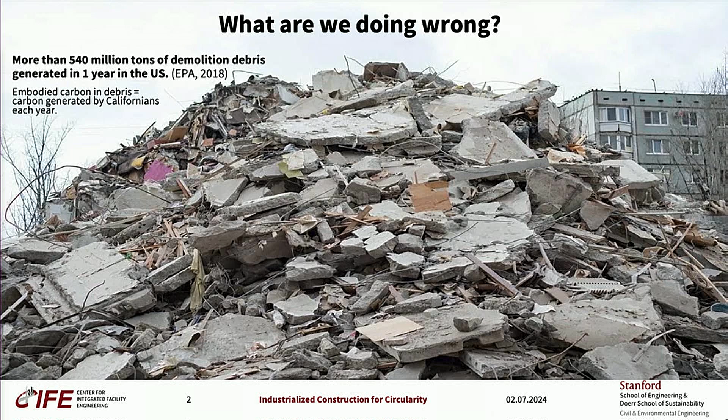If we think about design, we expect our buildings to live about 50 years or more. This is the typical design life. But we discover that, especially in some countries, the effective life of the buildings is much shorter. Buildings are demolished after 20 years or 30 years.

And if we look at reasons behind demolition, the buildings demolished are typically still structurally sound. Only out of many buildings demolished, only 3% of them show some structural problems. Many times we demolish buildings because we would like to do some redevelopment in the area they are located in, or because they are no longer suitable for our needs.

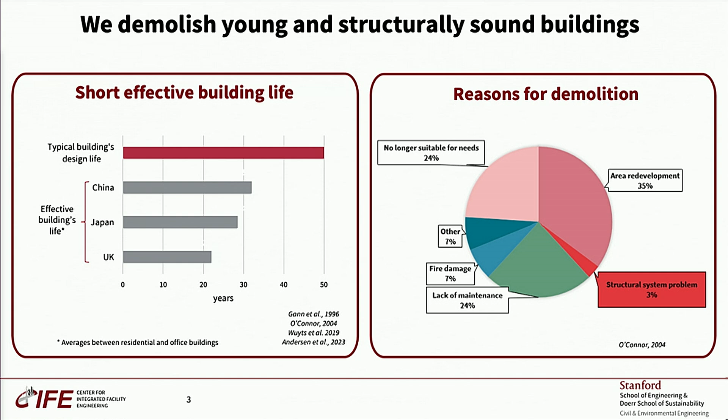So in summary, we demolish buildings that are still relatively young and structurally sound. And unfortunately, materials and components from these demolished buildings go to the landfill, where we would like to avoid placing them, and possibly recycle materials, reuse materials and components to make new buildings, and ideally reduce the amount of new buildings and extraction of raw materials.

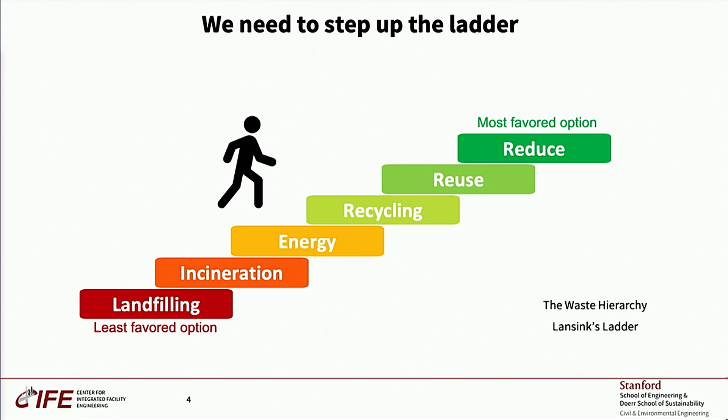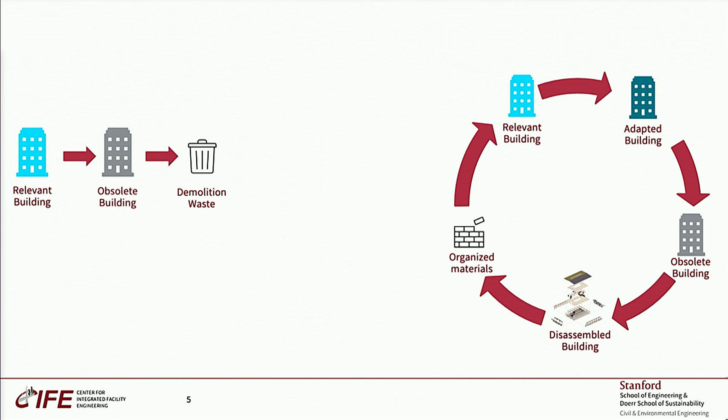So what we need to do is make a shift from a linear process in which we extract material, construct buildings, use it, demolish it, towards a more circular process in which we adapt possibly many times the building. And in case we don't need them anymore, it would be possible to disassemble them, deconstruct, and then in a very organized way, reorganize and reuse those materials.

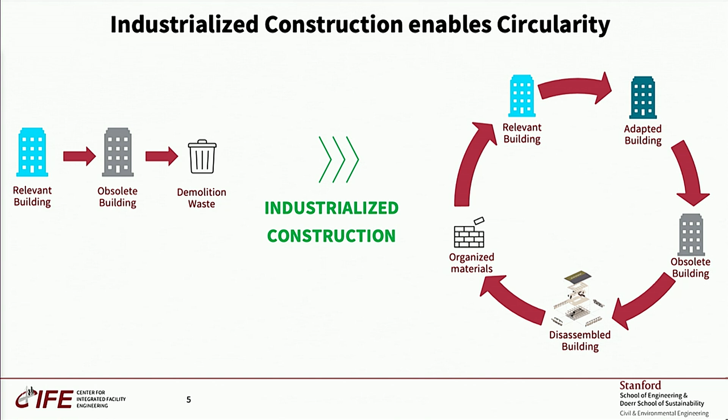And industrialized construction, I think, is the best strategy available nowadays that can bring circularity to our industry. And in this talk, I will talk about why and how we can do that.

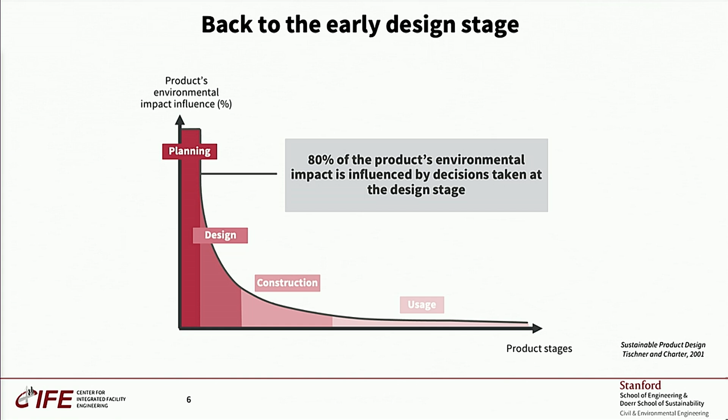So first of all, we need to go back to the early design stage. Because 80% of the environmental impact of a product is influenced by decisions that we are making at the early stage of design. The early stage is very critical, and we would like to put our project on a good track.

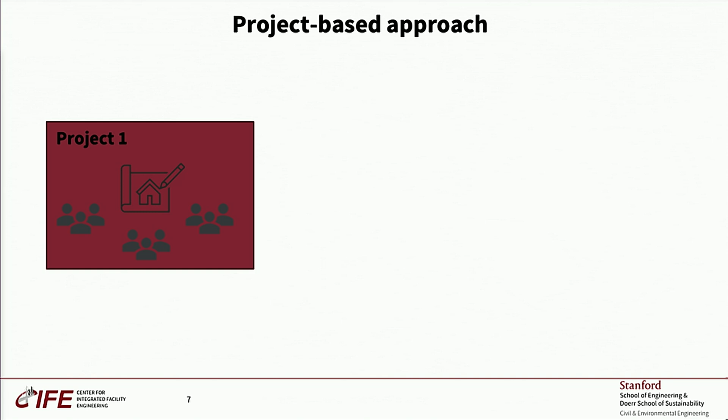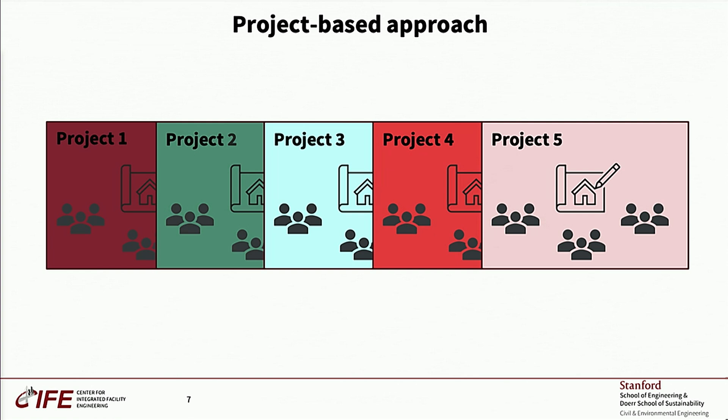So in a project-based approach, a traditional approach, we start with project 1, and we try to design a more adaptable building, more disassembled. We think about materials and technical systems to use. We complete the project, and then we move to project 2, and we need to do it again. And this is happening again for project 3, 4, and 5. And it's very difficult to achieve any consistency in improving sustainability and circularity of our buildings.

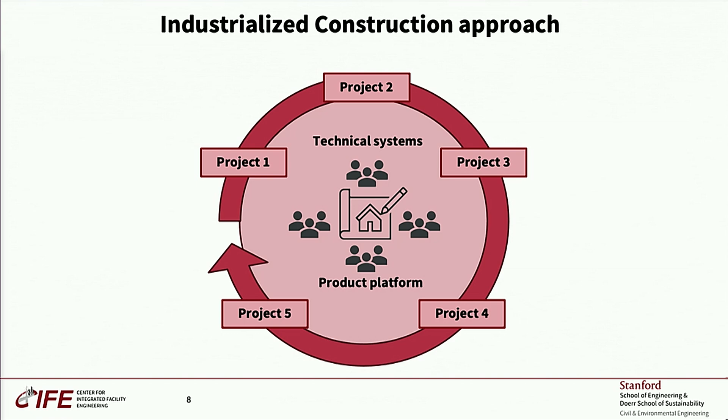So industrialized construction has advantages. Yes, the projects will slightly differ. They have variations, but overall, we can work with technical systems. We can possibly repeat the same technical systems over and over. And then we also work with product platforms that help us configure a building and pick different options, but a limited number of options still.

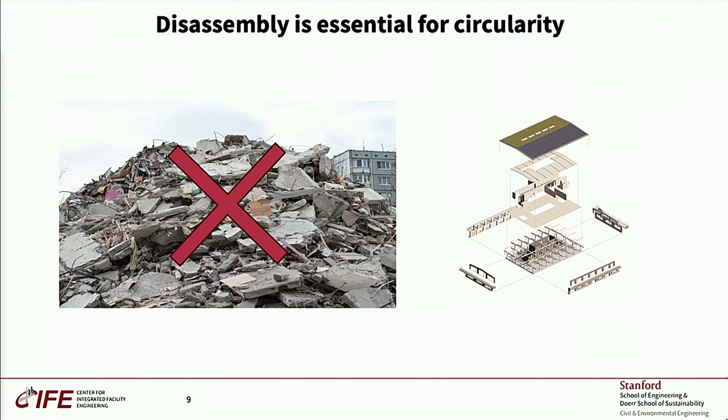So to avoid this huge amount of waste that we generate, disassembly is essential. And without disassembly, we wouldn't have circularity. So let's dive in. To ease disassembly, we can divide our product into different technical systems.

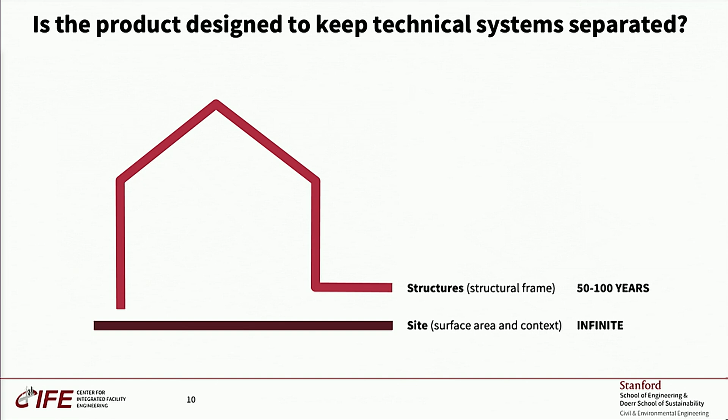So we have the site in which the building is located, but then we have the structure that hopefully lasts more than 50 years, and then other technical systems that have a shorter lifespan. We would need to divide technical systems with different lifespans. We have skin, so facade, envelope, and roof, and also services, which include MEP.

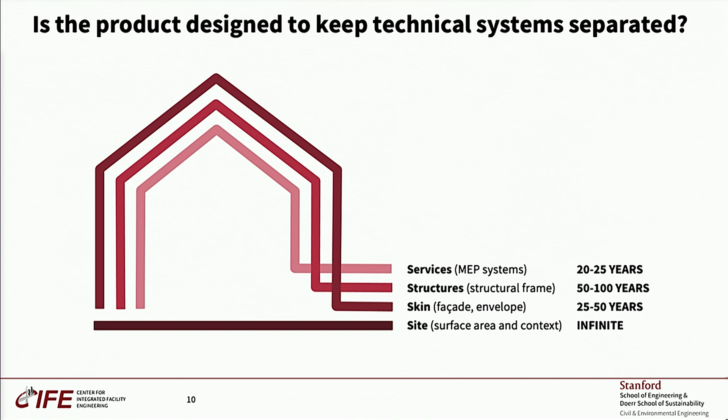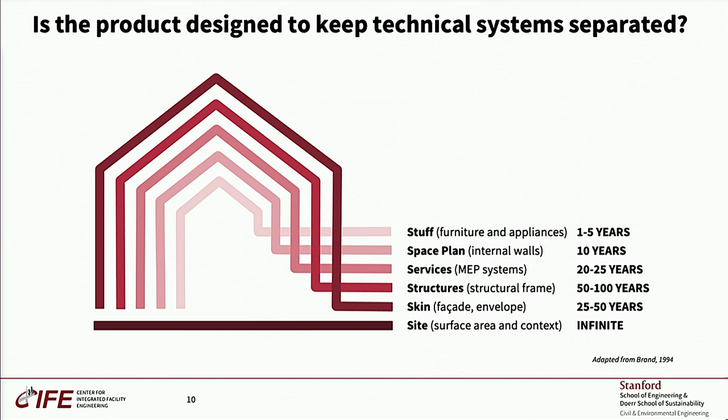Those technical systems, likely we would need to repair them, to access them, to maintain them, and also substitute them over the life of the building. So that's very important, that their life is shorter than the structure. And then also space plan, internal walls, and furniture and appliances with even shorter life. So these are the technical systems I'm referring to.

And when I looked at case studies, I realized we are not always keeping the technical systems separated. In particular, the way MEP systems are designed does not favor easy disassembly. As you can see, this pipe is embedded in the structural system. If I need to repair, substitute, or move it, it's really challenging.

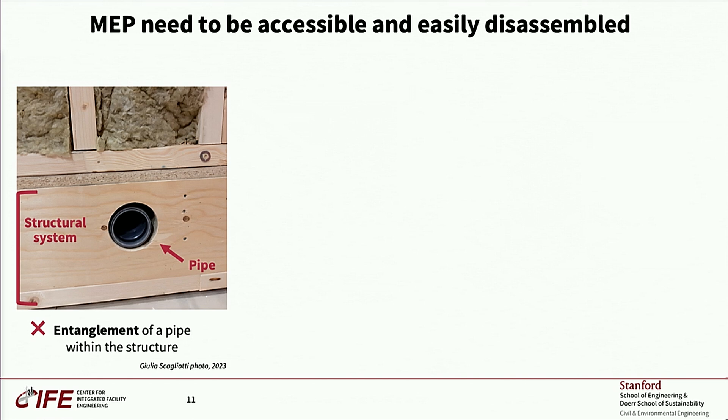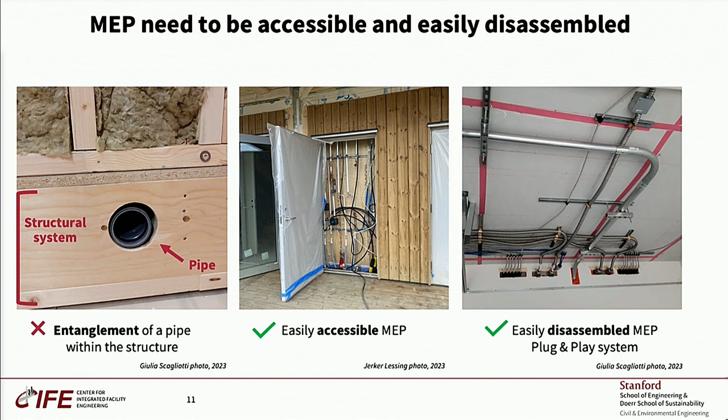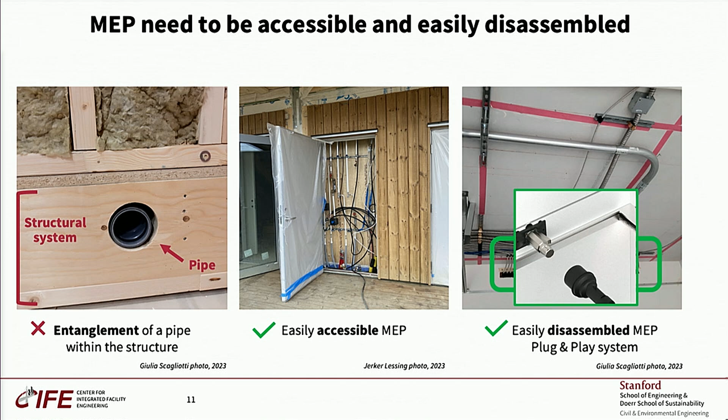But we also have good examples from practice. This is a good part of an MEP system that is easily accessible from a terrace. And this is a great example of a very easily assembled and disassembled MEP system. If we zoom in, we see that the connection is based on a plug-and-play system, really easy to assemble and disassemble.

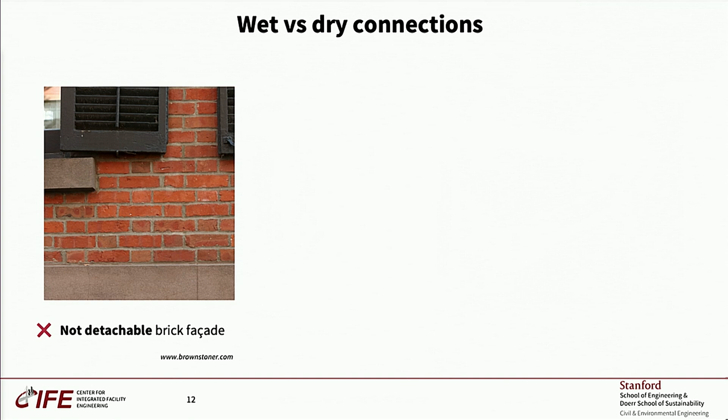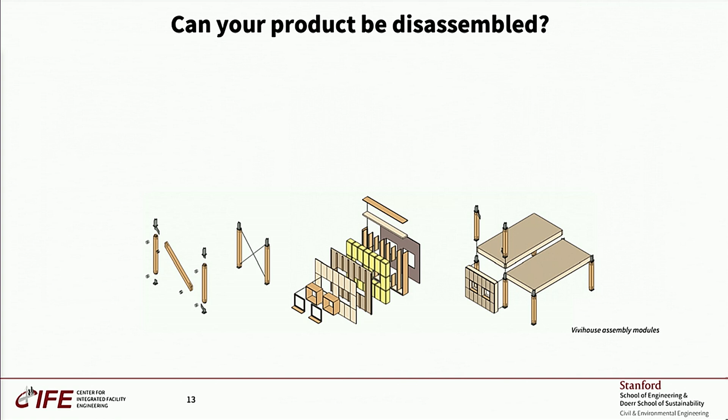And it seems we identified some technical systems that may work, but however, from interviews, I found that IC companies are aware about this, design for disassembly, but are not always interested in it.

Company one shared with me that they are making long-lasting buildings, and they are not dealing with disassembly. Second company didn't have disassembly among their priorities. Third company was very convinced to have a product that can be disassembled, but they never tried to disassemble one. And another company needed to disassemble their buildings because they made some mistake during construction.

And they shared with me that it was very, very challenging to disassemble their product.

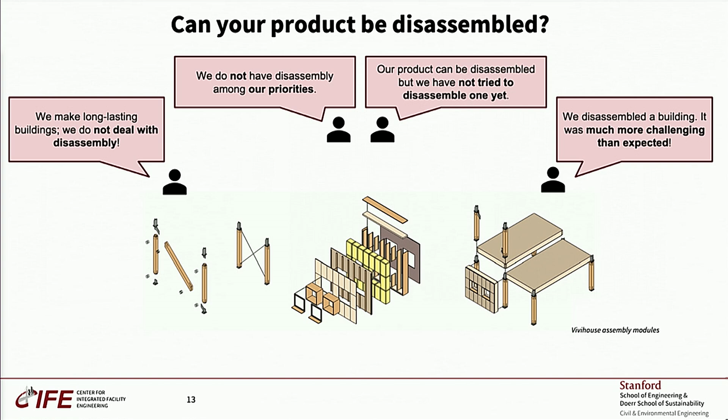And that's because it wasn't designed for disassembly. So disassembly should really need to be considered from the early stage, even if it will occur far in the future.

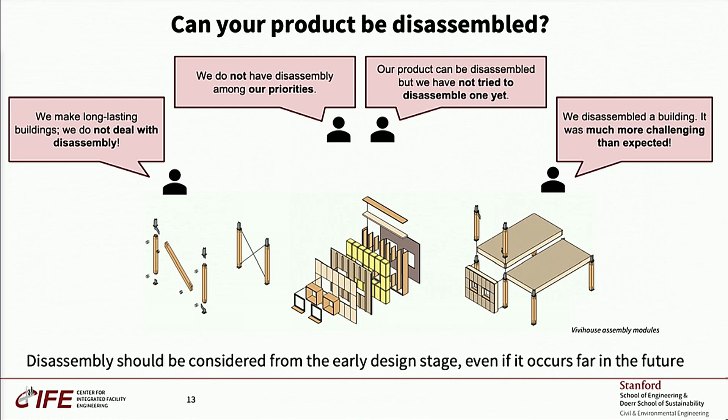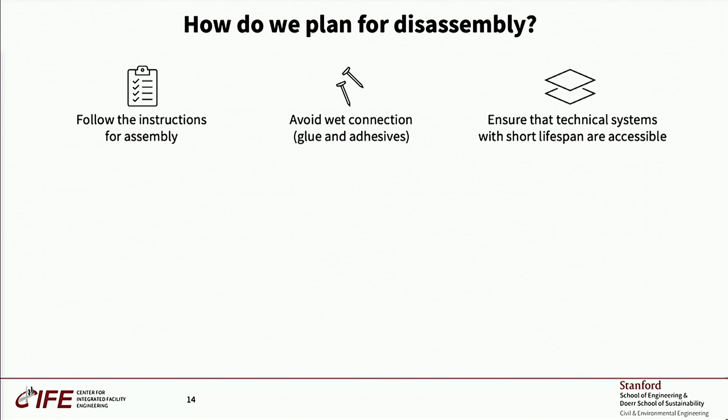So how can we plan disassembly? First, workers need to carefully follow some instruction without adding extra nails or extra elements during construction. We should avoid wet connection where possible and

favor dry connection, and also placing those technical systems with a shorter life in a way they are accessible. A solution that some Swedish companies found are developing guidelines for disassembly, in which they list all the steps they need to do to complete a disassembly project. They elaborate instructions, put images, and also the equipment needed to complete their disassembly.

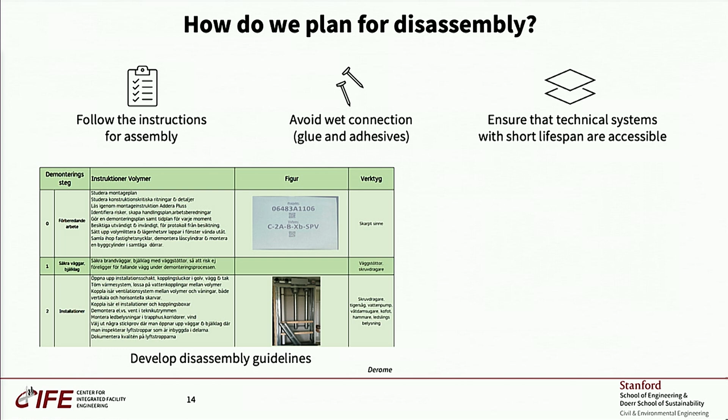And if during disassembly they encounter some problems, it would be very helpful to keep track of those problems and fix the product, and a continuous effort to improve their product and increase the disassembly potential.

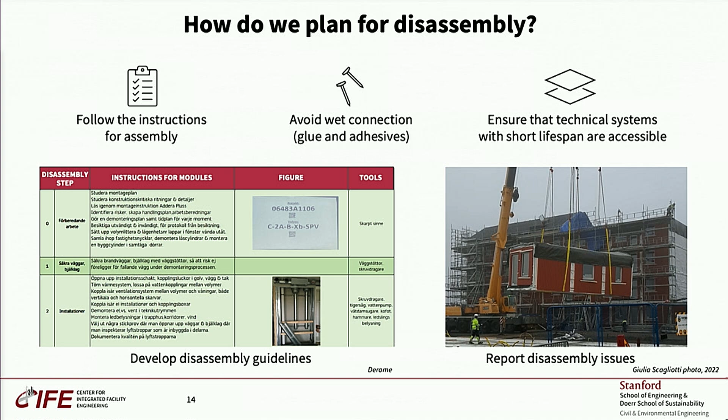So we know that we don't have only technical system, we also have product platform. They collect already the technical system and the elements within the technical system, but it would be very helpful to also model the interfaces, the connection, the type of connection, the material the connection are made of, the relationship between technical systems and elements, so we would know how a facade is connected to walls and so on.

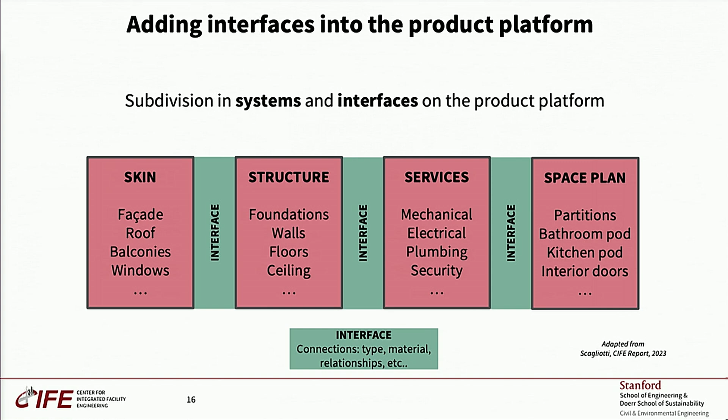And this is how a product platform that model also interface would look like. And we have product platform in which we have distinct technical systems.

We could add also a lot of information: the lifespan of each system, the materials they are made of, the quantity of material, the expected end-of-life treatment, if they are going to be reused, recycled, or downcycled, and the expected value those materials or systems can have. And compared to material, system can have a higher expected value.

So we basically are building a material and system passport in which we see the building as a temporary depository of material.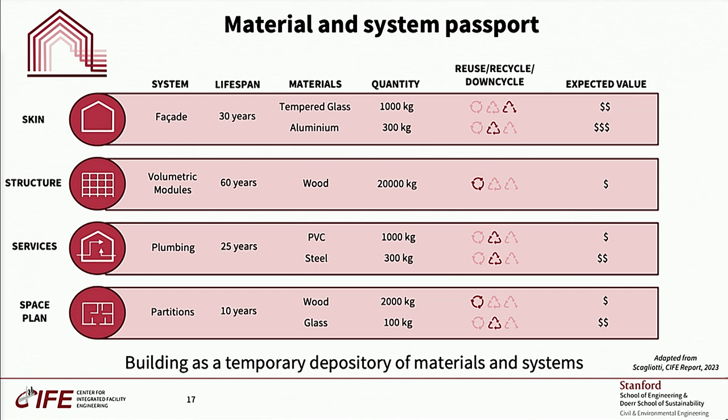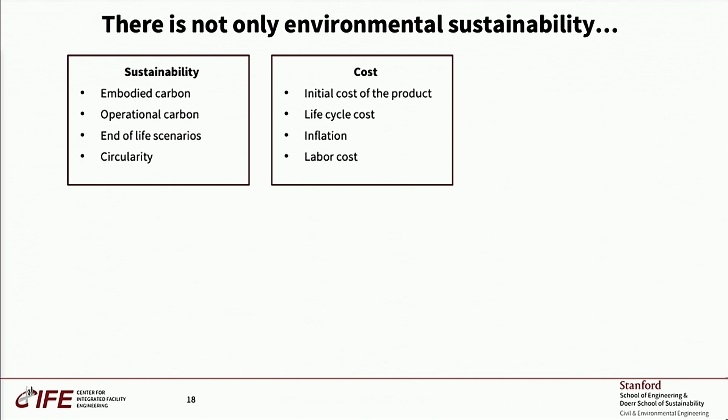But we know that there is not only sustainability. There are so many other needs and interests. So obviously also the cost. We are interested in the initial cost of our product, the time in which we complete a project, eventually if

we care about circularity, also the disassembly time, the quality of the product in terms of durability of their material and the systems, the suppliers, our relationship with them and the reliability of suppliers, and also some project specifics, and many other more variables. And obviously we need to comply. We must comply with certain regulation.

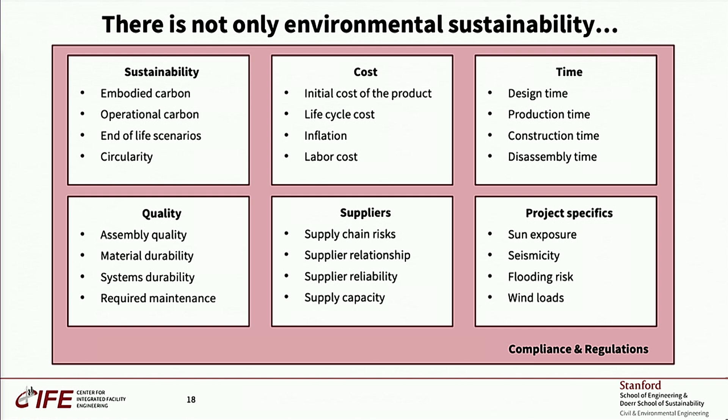These are all important, and we can look at other industries, how they look at the problem. Some of them adopt design for excellence, which is a concurrent engineering philosophy, in which X can be a variable that can have many values.

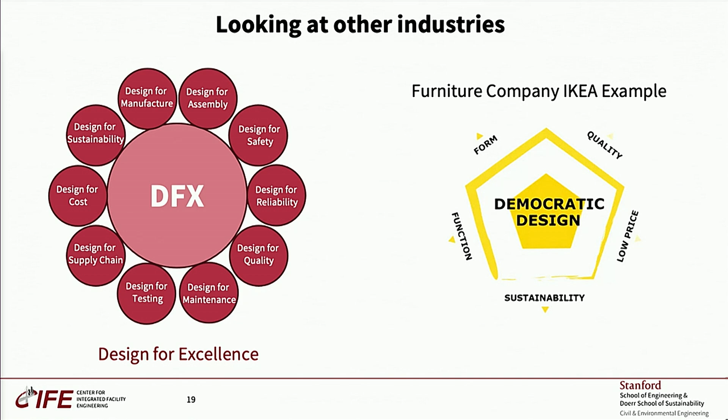And the furniture company IKEA is adopting this strategy and is selecting 5 core values, which are sustainability, form, function, quality, and low cost, low price. And they try to make those 5 core values work together.

And actually, industrialized construction, compared to a traditional project-based approach, has better opportunities to select the core values they are interested in and make them work together.

So we are not yet there, but we can get there. And sustainability teams should not be left alone in this journey. I can share a story from one of my case studies.

I went to the sustainability team, and they were very, very excited because they found a new supplier that could provide steel with a lower embodied carbon. So they wanted to buy that. But there are other departments.

And I went to the purchasing team, and they were not aware about that specific supplier. And they found that the material was too expensive. And then I went to supply chain, and since this company was building, their main material was steel, they say

that they can't rely only on one supplier because they needed many suppliers to lower supply chain risk. So from this example, you can see the many interests and the many variables that play a role in final decision. And only with synergy within an IC company, we would achieve better results and a more circular final product.